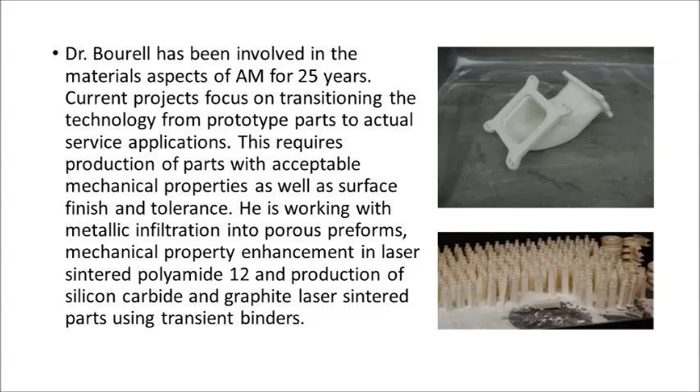Surveying where additive manufacturing is today. And there are other people that are going to be talking about various aspects of additive manufacturing for the rest of this course. So I thought my part would be to sort of tell you a little bit about where it came from and to provide some context.

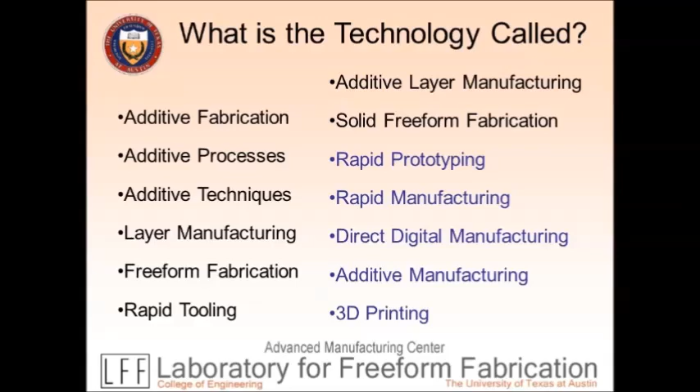The technology has, over the history of the field, which is about 30 years, had a variety of names. Here's about a dozen different things that we've called this. Additive manufacturing only became popular about 6 years ago, but it was called by lots of names, and the popular ones are the ones in blue here on the right side. Specifically, the last 3. Certainly, 3D printing is extremely popular because that's what the media and politicians tend to call it. Whereas additive manufacturing has really been what the technical field refers to it as.

Okay, so let's go on to the next slide. I think I covered this next one. Additive manufacturing really was adopted in 2009 by the additive manufacturing community. 3D printing has been less popular. There's reasons why we did not adopt 3D printing as the name, even though it's a really popular name and it makes really good sense. The main reason was that there was actually a process called 3D printing. So we didn't want to name the whole field after one specific process.

The analogy I use is it's like trying to come up with a name for automobile and calling it Chevy, because it just doesn't seem to make sense to call all automobiles after one car. That's kind of what was happening with the name 3D printing.

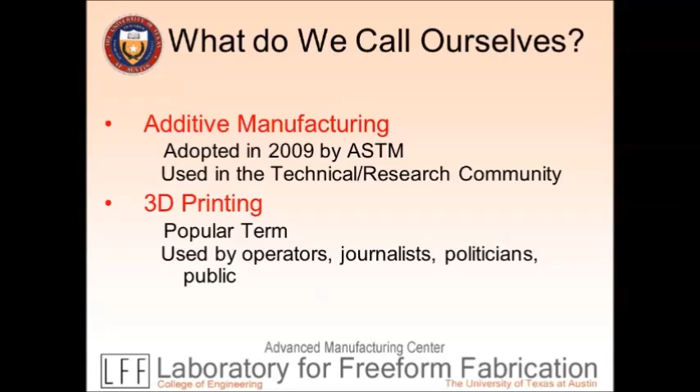Okay, so if we go to the next slide, it shows 3 different areas in additive manufacturing. If you click once, you'll see the prehistory. I believe there are 3 areas. There's topography and material deposition, and then the third area is photosculpture. We'll look at all 3 of these. So if the slide works well, you can see the word prehistory.

If you click again, I think what will pop up is precursors, which are processes that were developed from about 1960 until about 1984. If you click again, hopefully you'll see the Macintosh computer that pops up on the slide. What happened is that these precursor processes are people that had the right idea, but they were too early. They came before there was distributed computing, that is, before there were desktop computers. It was the Mac in 1984 that really made desktop computers popular. IBM had sold a bunch of machines prior to that. They all operated on the DOS system, which was really fairly unintuitive for a standard user.

Hopefully you can appreciate that with additive manufacturing, you have to have a computer to do the process. You have to have a computer to handle the files and to control the machine, but you also have to have the computer from the user side, for the user interface with the fabricator. And if the computer is so difficult to use that an average operator can't use it, then that defeats the process. That's what happened with these precursors. Then starting in about 1985, 1986, we have the modern processes. So I'm ready to go to the next slide.

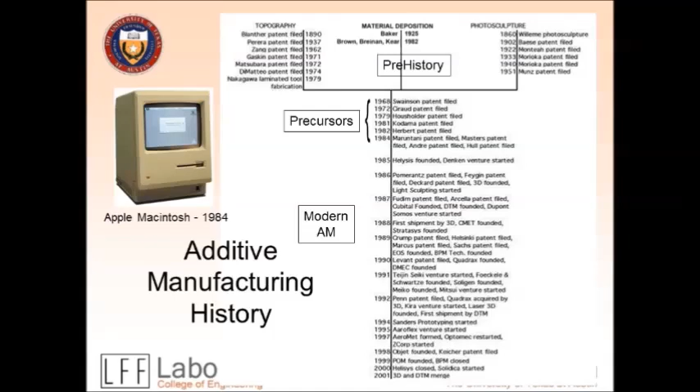I wanted to at least say something about the commercial processes that are available. This lists a bunch of the additive manufacturing processes that are commercially available. And what's notable, I list the date of commercialization. This is when the company was formed and actually sold the first fabricator. So stereolithography was the first one, came out in 1987. First machine sale, fused deposition modeling, which is Stratasys. All the low-end 3D printers are based on this. Then laser sintering, first machine sale in 92, etc.

But what you have to appreciate is that all of these technologies were invented in a space of about 5 or 6 years after the Macintosh came out, from 84 to 89. That was when the inventions took place, and then the commercialization took a few years later. My point here is that there was just an explosion of 3D printing and additive manufacturing in the mid to late 1980s in terms of the inventions and the development.

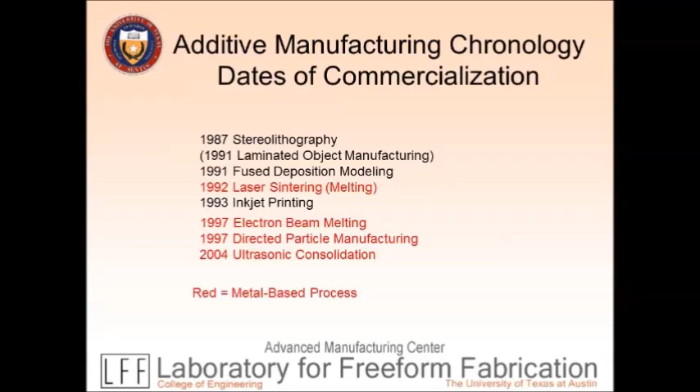It was all enabled by the computer, specifically an easy-to-use, intuitive computer like the Macintosh. All right, so let's look at this. The next slide shows a nice little welded cup. It looks exactly like what we see with directed energy deposition today. There's a base plate that the part's built on, just like we do today.

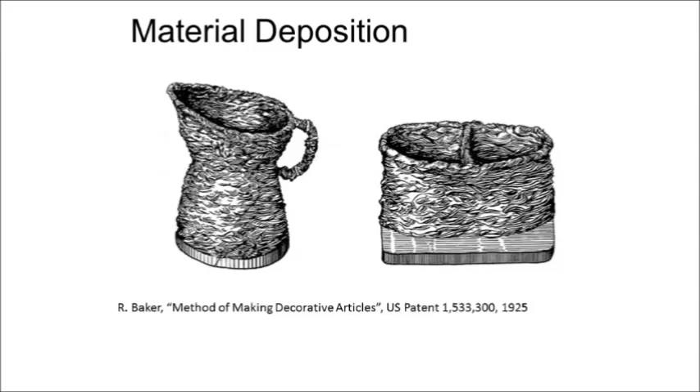But if you click one more time, you can see that this actually is a drawing, a patent. It was written by a guy named Baker in 1925. This is the first of the precursor processes created in manufacturing. But again, hopefully you can see what it looks like today with an Optomec machine, which is what I show here, and with some nice parts on the other side that show what the modern technology looks like. But again, this traces back to 1925 at the very least.

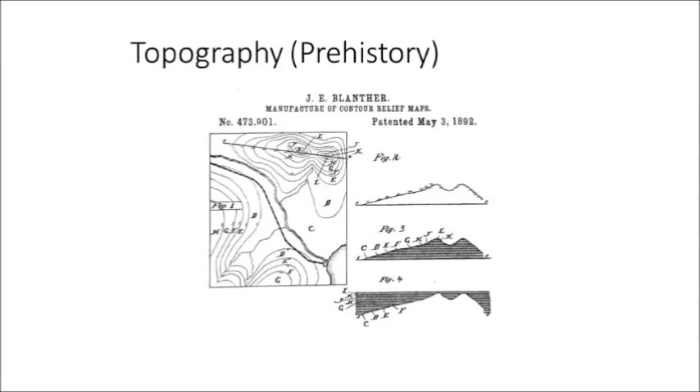If we click onto the next slide, hopefully you see a Blanther patent. This was an 1892, I think, patent from Blanther. What he did is he was doing a cut and stack approach, where he'd take wax plates and lay them over these topo maps, and then draw a line around the constant elevations to cut the sheet into two pieces. He'd then take those two pieces, like a positive and negative, and stack them to create a mold, which you see on the bottom right-hand side of this figure. He would finish it a little bit, then use it to print paper three-dimensional topo maps. So that's the cut and stack, or the stack and cut approach.

If you click one more time, hopefully you'll see the Mcor machine, which is an Irish machine. It's based on this technology. It's a nice machine because it just uses regular sheets of paper that are glued to each other, and then has a cutter that comes along and cuts it. And there's also a little printer that will jet down ink in different colors, so you can actually make these spectacular colorized objects. The little shrunken head here that you see is one of the principals of the company. It's about 3 inches tall. That was made using this technique.

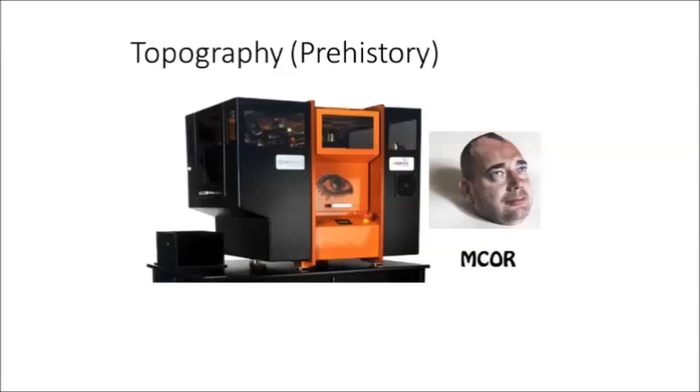If you look very carefully, you may be able to see a layer line, but they're very, very difficult to spot. So anyway, this is, again, our modern technologies that come from prehistorical development. So we have material deposition, and then topography is the second. The third one is photosculpture, which is the next slide.

This shows a couple of photographs from François Willème's photosculpting studio in the 1860s. He was in Paris, and if you look on the right side, you see a subject. This is Admiral Farragut, who was a Civil War hero from the United States. He's sitting on this platform that's split into 24 different sections. And if you look at the black boxes behind the figure on the wall, behind those windows are cameras. There were 24 cameras around the room, and Willème would shoot simultaneous photographs of the subject at 360 degrees.

And then he'd take silhouettes from those photographs, and using the contraption on the left side of the photograph, the thing that looks like a linkage contraption, he would create a 1/24th wedge of the sculpture, which he would then have an artist assemble to create the finished object. So he's using photography to create these sculptures.

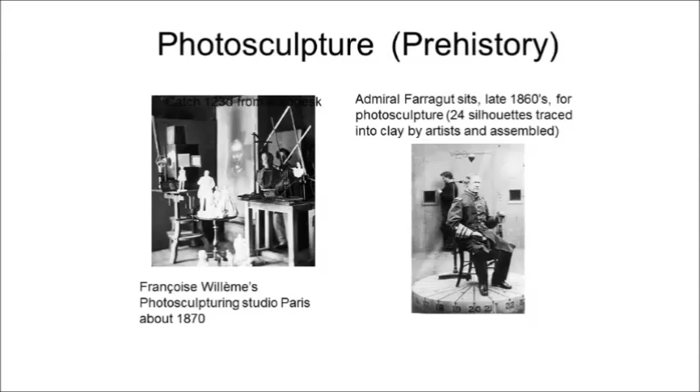If you click one more time, hopefully what will pop up is a photograph of a former student of mine. This is Farshad Khan, an undergraduate, who used a modern approach to photosculpture. He used this free software download called 123D Catch from Autodesk. It's a cell phone application, so you can download it to your cell phone. The way it works is you have a subject stand still. You open the application and get the camera feature on the iPhone. Then you march around the subject and take random photographs, like 30 or 40 photographs.

These upload on the cloud to the 123D Catch software. Then the software will stitch those together using image recognition and create a three-dimensional object, a sculpture as it were, as a point cloud, which can be converted to an STL file, downloaded and then printed. So what he's holding here is actually a print of himself made on a 3D printer using 123D Catch, this photographic software.

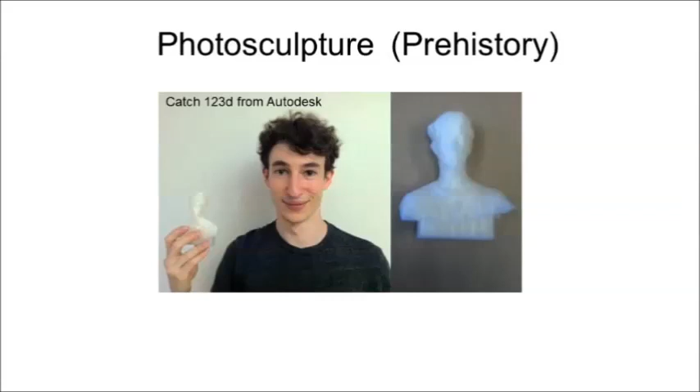Okay, let's look at some of the precursor processes. The earliest one is this one by Swainson, 1968. He shows basically a 3D copier in his patent.

On the left side, he has laser interferometers to capture the geometry, the geometric image of a part, like this cone in this case. That worked really well. But then he would shoot it over to the printer, which had 2 crossed lasers, and the plan was that where the lasers crossed, the energy would be different, and we could actually create the object in space.

This was never reduced to practice. People have tried to do this. It simply can't be done. The closest we can get is 2-photon polymerization, which is used to make really small objects, where we can create an object in volume within a stereolithography fluid. But to make a regular object, this simply doesn't work.

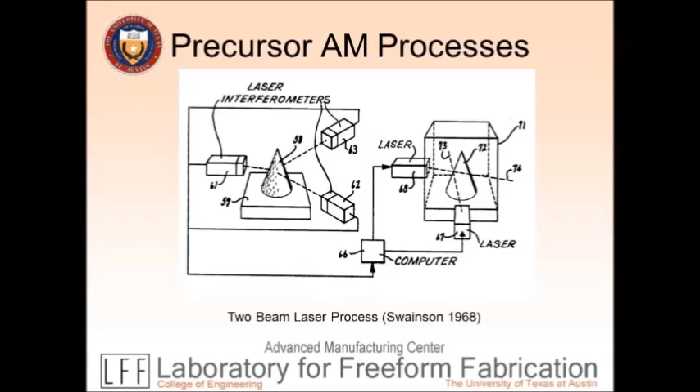But this was the earliest one I've been able to find. If you go on to the next one, it should be Ciraud's powder laser process. Ciraud was a Frenchman. This was a German patent application in 1972, never actually issued, but he did do the application.

But if you look at this, this has all the features of directed energy deposition, or like the Optomec process. You have powder in a feeder that comes down, sprays it through 2 energy sources, could be laser or an electron beam - that's 7 and 7A. Then the parts being built that you see there, and then the powder is cycled back up to the hopper. So this has all the features of modern Optomec LENS-type technology, or PALM or LAMP. There are a number of companies using this, but it was done here in 1972.

And the reason that Ciraud didn't make a mint off of it is because there were no computers to drive this, so there was no way to get the geometry information input. There was no way to talk to a user to make it happen.

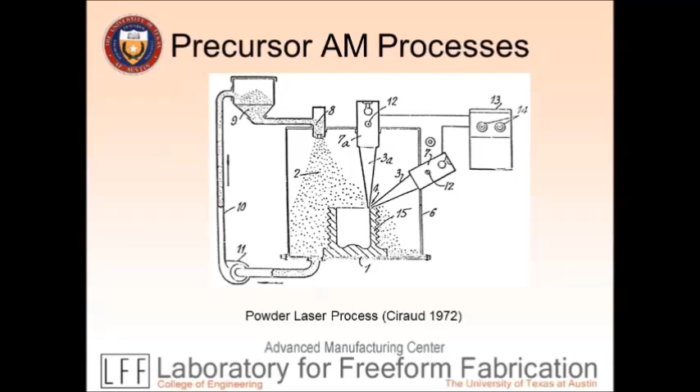Okay, charging ahead, the next one is Housholder. This shows 2 systems by Housholder. The one on the left is the one that's important. Basically, in 1979, he invented laser sintering - this was 8 years before Carl Deckard at our place in Texas invented it. And what he's got, if you look at the left side, going from the top down, he has all the features of modern laser sintering. He's got the laser at the top.

He's got the 2 scanning mirrors. Going down, he has the laser rastering over a surface. If you look at the platform or the powder bed, he even has a recoater blade, just like what we see in the EOS machines today, running back and forth, spreading powder. Again, this was done in 1979. Didn't go anywhere - it's because there were no computers to drive it.

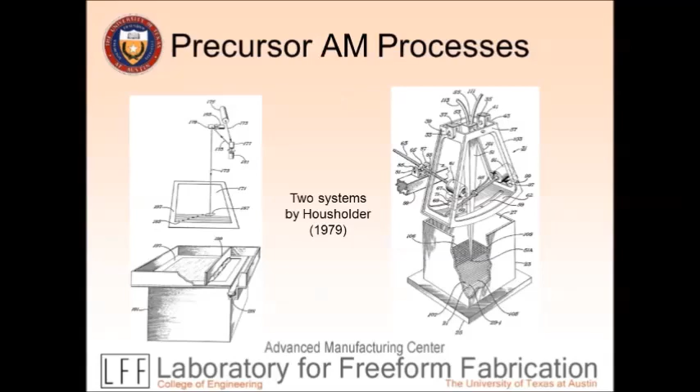The next one is Kodama. He was Japanese at a research institute. He invented stereolithography 3 years before Chuck Hull did. And what's shown here are 3 images for producing the part.

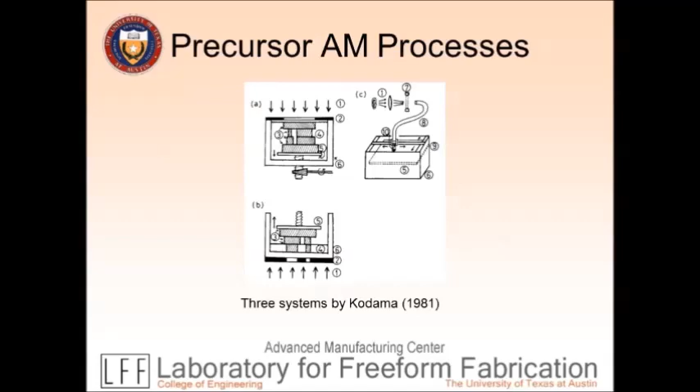He has in A, the top-down version, which is what we use for mask, which is what's used today with the digital micromirror arrays. In number B, he has the bottom-up printing, which if anybody's familiar with Carbon 3D's CLIP machine, where they build the object out of the liquid, that's exactly what this is - done 25 years before Carbon 3D did it. And then in C, it shows a gantry with a moving light source, which again is a common method for doing stereolithography today. So again, this was 1981.

Going on to the next one is Herbert. He was at 3M. In 1982, he also invented stereolithography. He's got the laser, he's got the photopolymer, he's got the lens for moving things around. He's got a plotter that actually will move the beam around - it was an HP 7225A plotter to move the part around. So he also had invented stereolithography before Chuck Hull did. Chuck Hull was the founder of 3D Systems.

So this shows the same deal. And again, the deal is that there was just no way to have a computer interface for people, for the operator, for the part generation, and to talk to the machine. It was just too difficult to do back in those days.

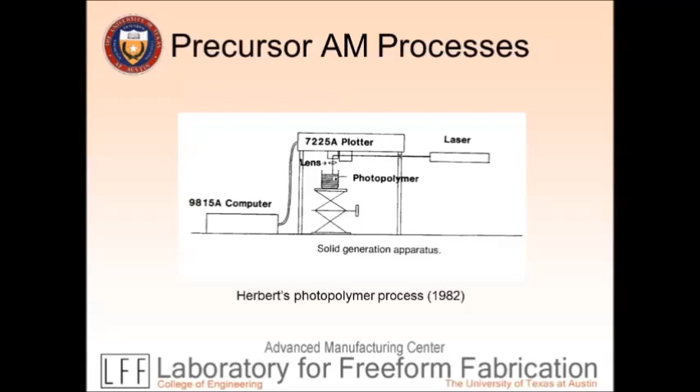Okay, so if you jump ahead, this is one of my favorite slides. It's first articles - this shows the first articles that were produced. It shows Kodama stereolithography, Herbert stereolithography, Carl Deckard at my place built his first part produced using laser sintering. And then there's Housholder's sand castle pyramid that he built using laser sintering, again, back in the late 1970s. We've certainly come a long way since this.

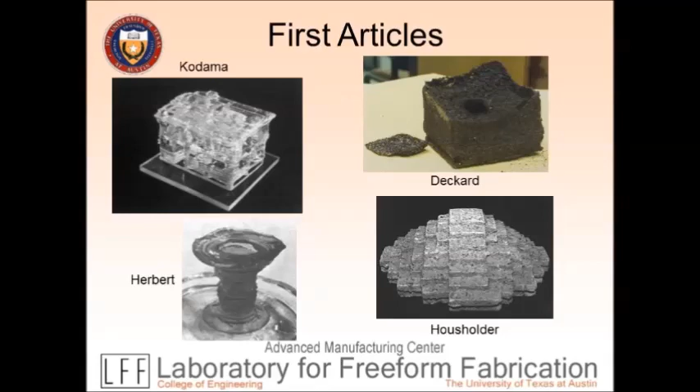Okay, so anyway, moving on through the history, it was in 1986 that Chuck Hull and Raymond Freed formed 3D Systems. 3D Systems is a very, very big company, still in business, going strong - one of the two big additive manufacturing companies in the U.S.

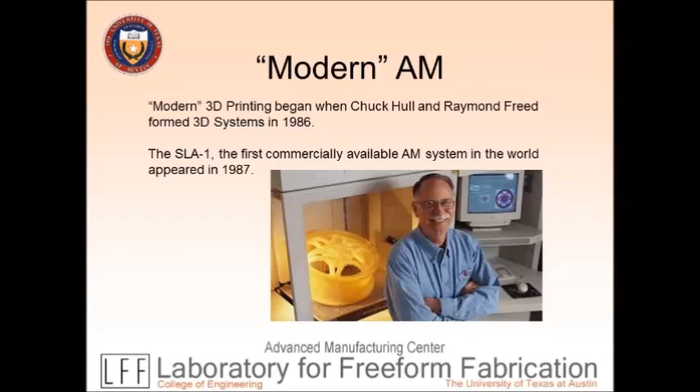The SLA-1 was the first commercially available modern additive manufacturing system in the world. It appeared in 1987, so it's been almost 30 years since additive manufacturing started. It's really popular today, all a buzz, but the beginning of additive manufacturing was 1987 with the sale of the SLA-1.

I wanted to say one thing about the future of additive manufacturing using this slide. This is from a study on additive manufacturing done in 1998. Back then, this technology was called rapid prototyping. It shows a bifurcation of processes, saying that in the future there would be so-called design verification systems moving forward from 1998, and this actually panned out.

These are what today we call the low-end 3D printers, the MakerBots, RepRaps, and Fab@Homes. Those are the design verification systems. But they also said there would be direct manufacturing systems, which has also panned out - high-cost machines that produce parts with engineering quality for use in service applications. While some details on this slide are incorrect, it's true that we have really expensive machines and really cheap machines, and both are going strong today.

The reason I mention this in terms of the future is I believe that over the next 5 to 10 years, these two are going to start to converge back towards each other - the two curves are going to come back together. Whether they actually come together is speculation, but I think the trend will reverse, because I think these expensive printers are going to come down in cost as the patents expire and there's increased competition. More people will enter the market, which will impact the cost of the fabricators, which will impact the cost of parts produced.

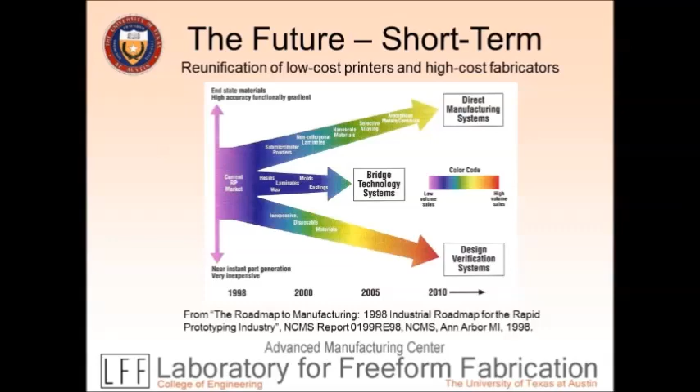Finally, for my next to last slide, I have the conclusions. Additive manufacturing has a rich past dating back over 150 years for precursors, and I think the technology is going to continue to grow. I'm sure Terry Wohlers last week talked about the growth of the industry over the next 5 to 10 years. I think market penetration is going to increase because people will find more and more uses for these technologies and the parts produced from them.

I think we're going to see a proliferation of fabricators, driven not only by interest in the field but also by the expiration of patents. I'd mention the explosion of material extrusion machines, the MakerBots, RepRaps, and all those low-end printers, really occurred after the original Stratasys patents expired, which issued back in the early 1990s.

Finally, I think the future is exciting. There's a long way to go. I think we haven't seen the best of what additive manufacturing has to offer yet, and that makes it really exciting for everybody.

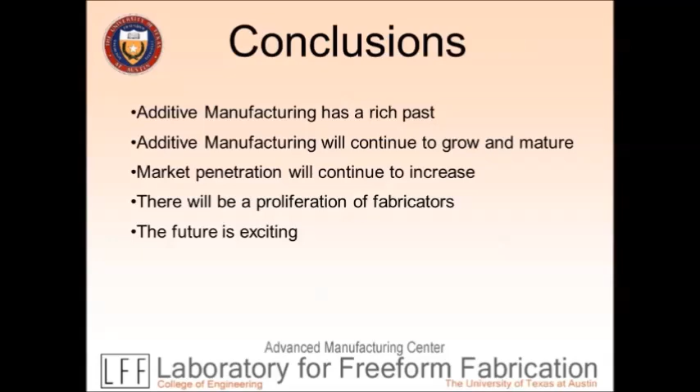Okay, I'm back. I'm back. Thanks, everybody.